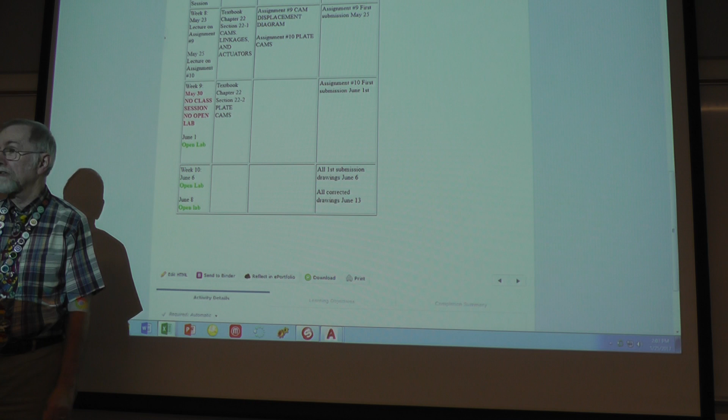All right. I have done a couple of things here recently, as in today. I have gone back in and actually updated the course calendar for this class to make it actually accurate to how things are happening. We are on May 25th, week 8, and the last lecture on the last assignment is today for assignment 10, and that'll be it.

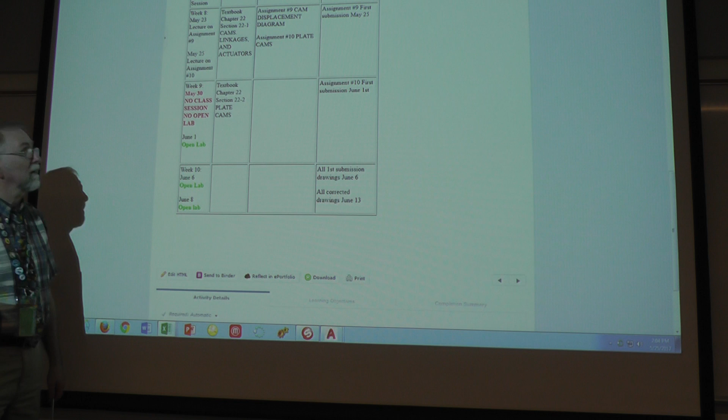Assignment number 9, the cam displacement diagram, is due today. That is a printed out B-size drawing, and I have some to hand back from people that turned some in Tuesday. Next week, there is no class session and no open lab next Tuesday. I'm taking half a day personal leave because I have to use it up or I don't get it. So I'm going to take it. I've got some retirement paperwork I have to do, and that's just the way it is. So don't expect anybody to be here next Tuesday.

Is that for evening class too? Evening class will still be in existence. No, it's just for the kinematics class. You don't get any time off for that. If I'm here, you're here.

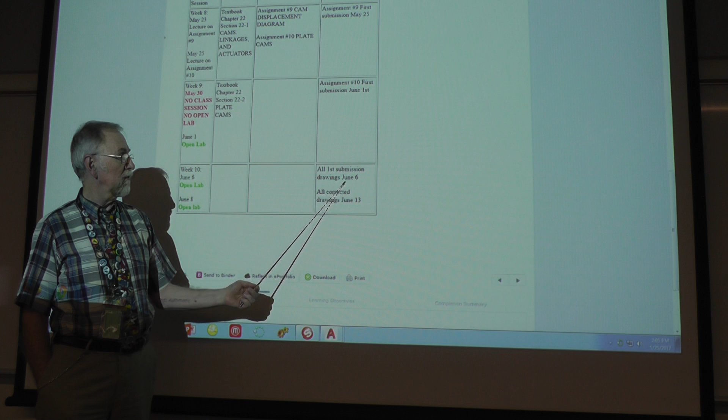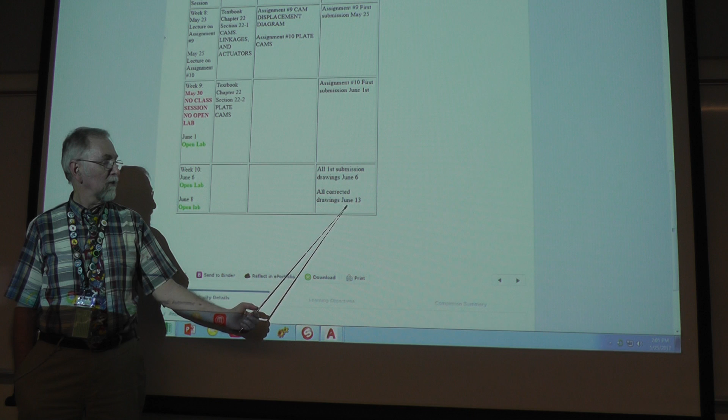Assignment number 10 that I'm giving out today, the first submission will be due next Thursday, June the 1st. And then any and all first submission drawings need to be in to me Tuesday, June the 6th. And all drawings that have to be corrected need to be turned in Tuesday, June 13th, and that's it. There will be no drawings accepted after that point. I have to get my grading done because I'm leaving. So I don't want to be here till Friday, working on it over the weekend or whatever.

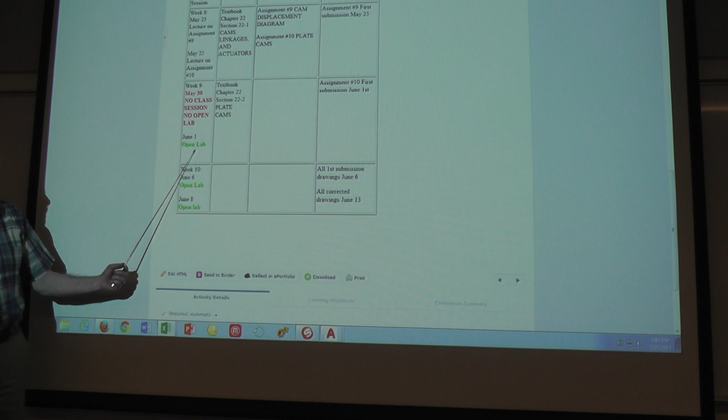So that's it. Which means there will be open lab June 1st, June 6th, and June 8th that you can come in and work on assignments, anything that needs to be taken care of. All right, questions? Crystal clear. All right.

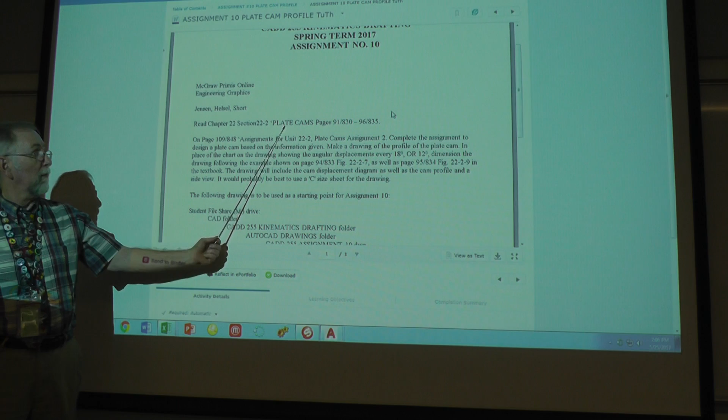Then the assignment. Let me go back up here to content. Assignment 8 is still in here. We did not do assignment number 8. There was just a bunch of drawing to be done, and I gave you a break on that. So assignment number 10. The actual assignment itself as a document is chapter 22 out of the textbook, section 22-2 about plate cams, pages 91 to 96. It would probably benefit you to go in and take a look at that.

On page 109, assignment for unit 22-2 plate cam, assignment number 2. Complete the assignment to design a plate cam based on the information given. Make a drawing of the profile of the plate cam. In place of the chart on the drawing showing the angular displacements every 18 degrees or 12 degrees, dimension the drawing following the example shown on page 94. I'll go back and pull that page up and show you what I mean, as well as page 95 in the textbook. The drawing will include the cam displacement diagram as well as the cam profile and a side view.

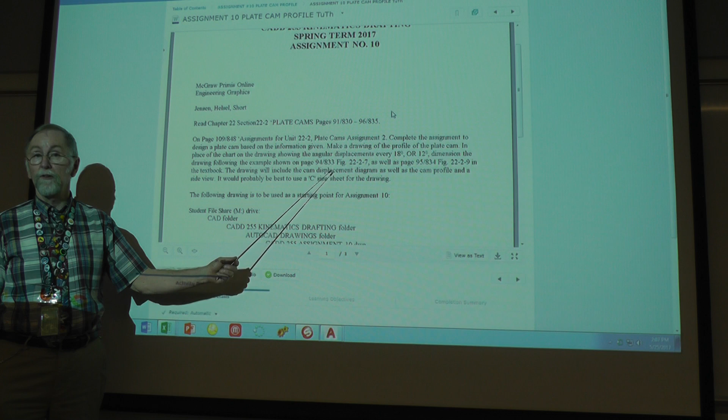It will be best to do it on a C-size drawing. You should do it on a C-size drawing. Maybe I should say that. You did assignment number 9 to create a cam displacement diagram. In order for you to know the process, I have drawn the cam displacement diagram for you in this assignment to make it a little easier. You're welcome. And the following drawing is to be used as a starting point for assignment number 10.

It's accessible on the M drive, student file share, M drive, CAD folder, CADD 255 kinematics drafting folder, AutoCAD drawing folder, and the drawing name will be CADD 255 assignment 10 drawing. It is also available in the D2L folder as CADD 255, or maybe it's just assignment drawing. I'll take a look at that.

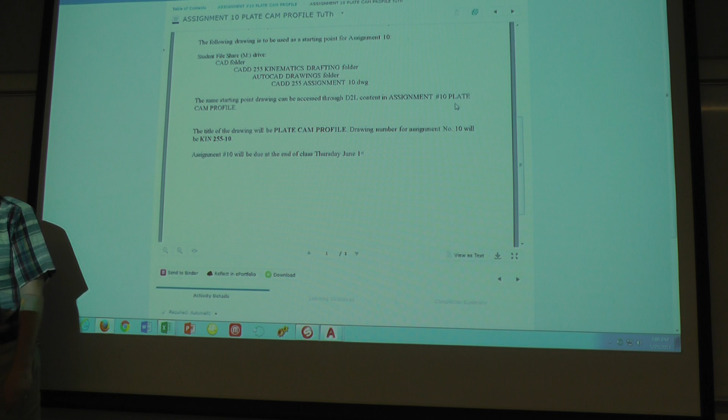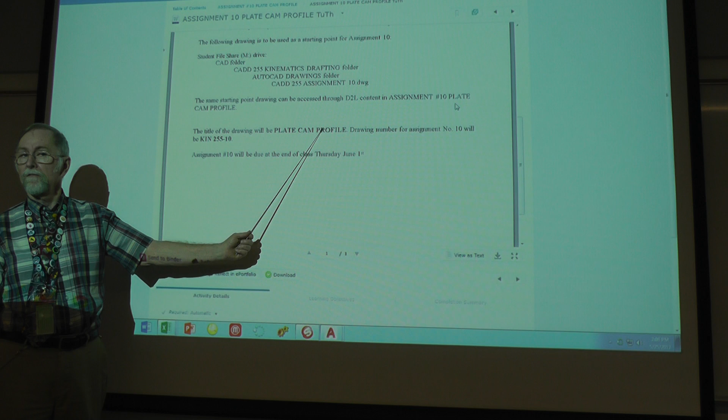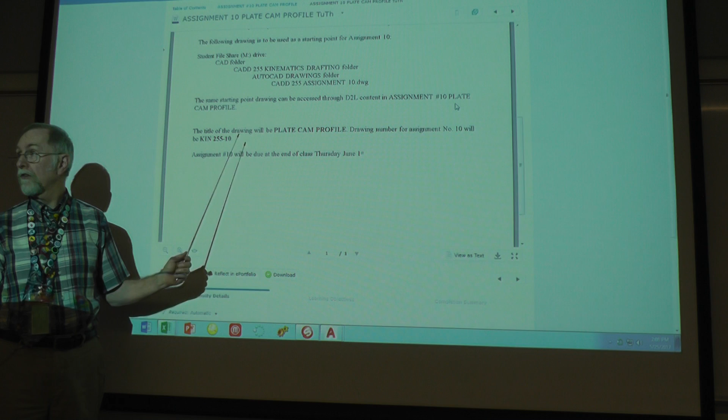All right, title is going to be plate cam profile. That height is 5/32 of an inch. The drawing number is KIN 255-10. The height of that is 1/8 of an inch. Yes. This is a 1-to-1 ratio drawing. It's just full size, 1-to-1.

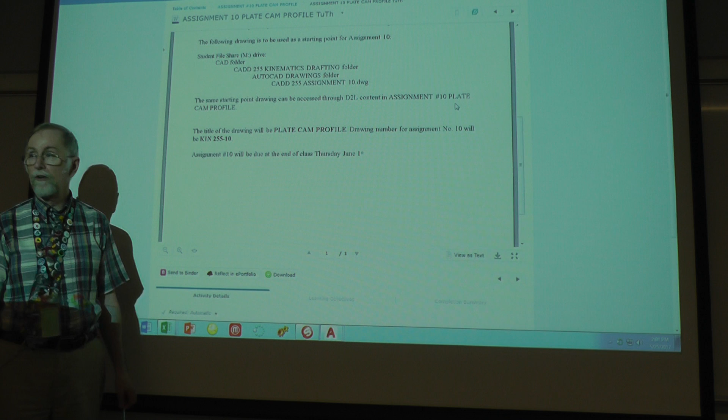And then here it is, due at the end of class on Thursday, June the 1st. It's not a very difficult drawing. It's kind of tedious to put it together in a way, but it's not that hard. You just have to keep your mind about you. All right, any questions on that? All right.

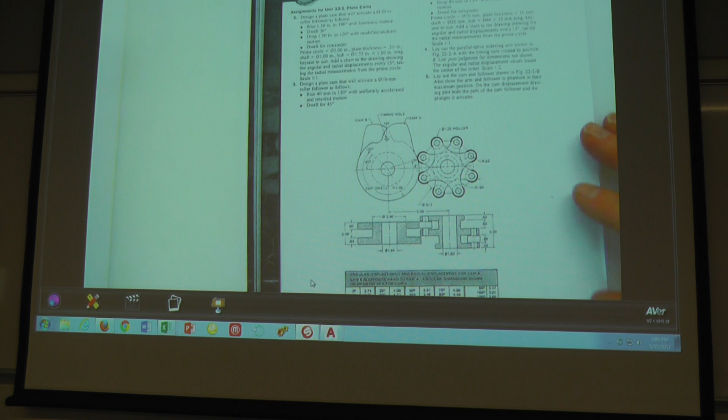Then let's take a look at the textbook. Our wonderful little projector here that never seems to quite focus.

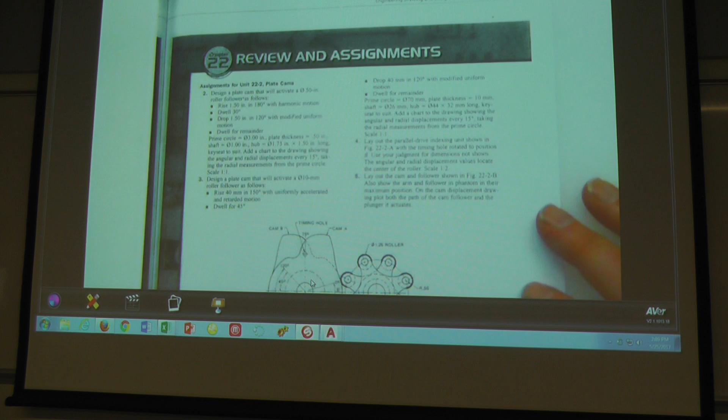You know, as soon as I leave, they'll get a new video projector in here that'll be crystal clear. That's probably what will happen. They kind of threatened that they were going to replace it this year, but I never followed up on it. That's probably my fault. Hey, what about our new video camera?

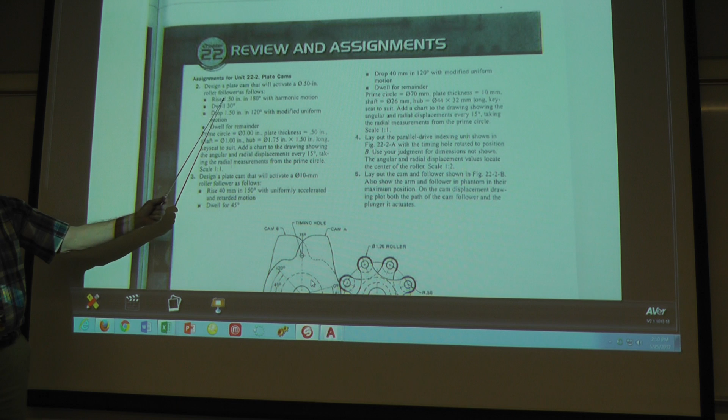All right, a plate cam that will activate a diameter 0.50 inch roller follower. So that's the diameter of the roller follower, 1/2 inch. The design criteria is it's going to rise 1.5 inches in 180 degrees with harmonic motion. It'll dwell for 30 degrees. It'll drop 1.5 inches in 120 degrees with modified uniform motion and dwell for the remainder.

There is something called the prime circle that is 3 inches in diameter. I'll explain that more fully when I pull up the AutoCAD drawing. The plate thickness of the cam is 1/2 inch. The shaft that's going to go through the plate is 1 inch in diameter. The hub that's attached to the plate that the shaft is going to go through is 1 3/4 inch in

diameter by 1.5 inches long, and the key seat needs to be sized to suit that, although you'll probably find in the drawing that I gave you it's already been sized and it's correct, so you can go back and verify that. I know you will. You'll want to go back and check to make sure that I did the right numbers here.

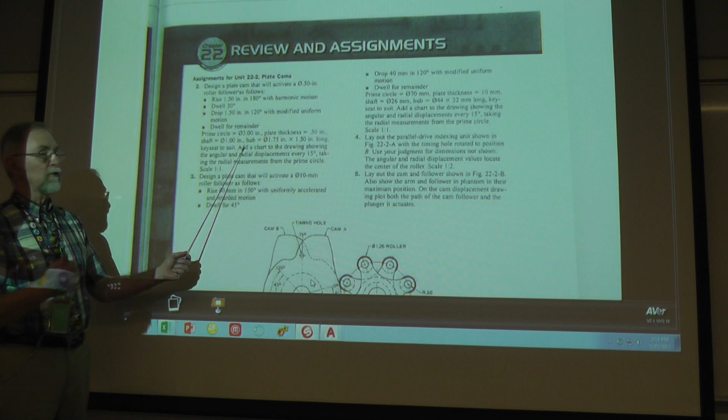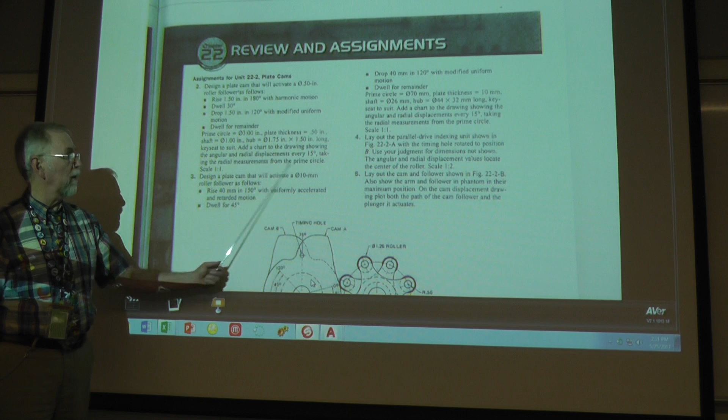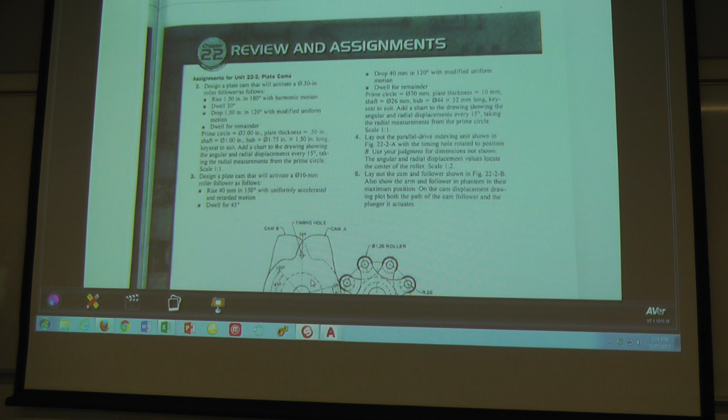All right, in the example drawing in the textbook, and in this assignment, it says to add a chart to the drawing showing angular and radial displacements every 15 degrees, taking the radial measurements from the prime circle. We're going to do some of that. You're not going to do all of this in here. We're actually going to draw it up a little differently and not include a chart. So that's the actual assignment that you can go back and reference. And the drawing will end up looking like this.

When I get done talking about this particular project, I'll pull the screen up and the sample drawing, full size, will be behind here on the C-size drawing that you can take a look at. Also in D2L, there is a PDF that you can access. So the AutoCAD start drawing, which I'll get to, that's the cam displacement diagram, and the PDF sample drawing is available to you, as well as your cell phones and taking a picture of the drawing that you seem to like to do.

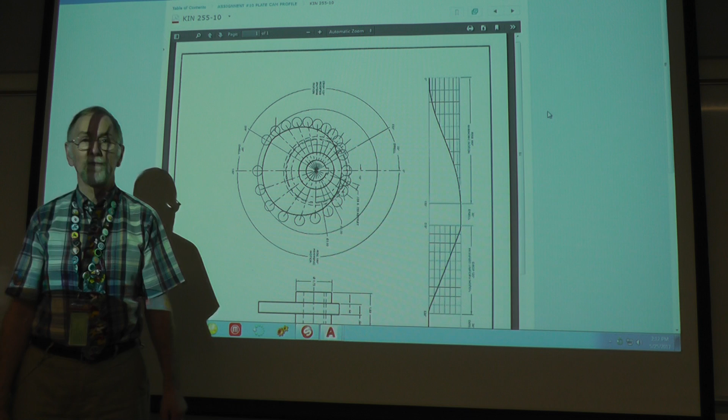All right, questions so far at all? You don't know enough to ask the questions. All right, then let's dive in here.

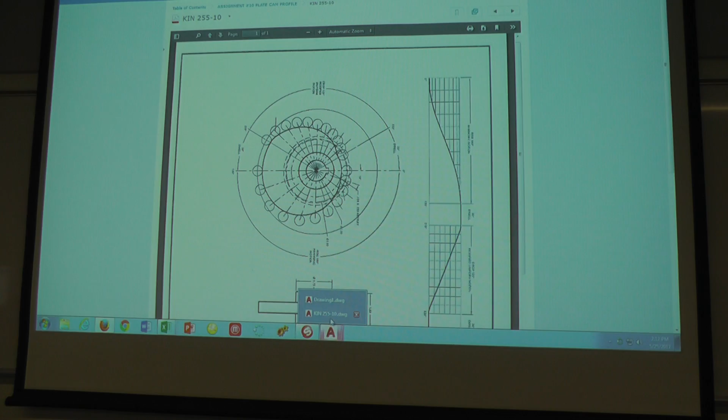This is already in the drawing, slightly over to the side. Just like in assignment number 9, you're going to use Arial font, bold font style, 0.10 height for the indicators of where the rise starts and stops increments, where the dwell period stops, where the drop starts and stops, and where it stops at the end here in the last dwell period.

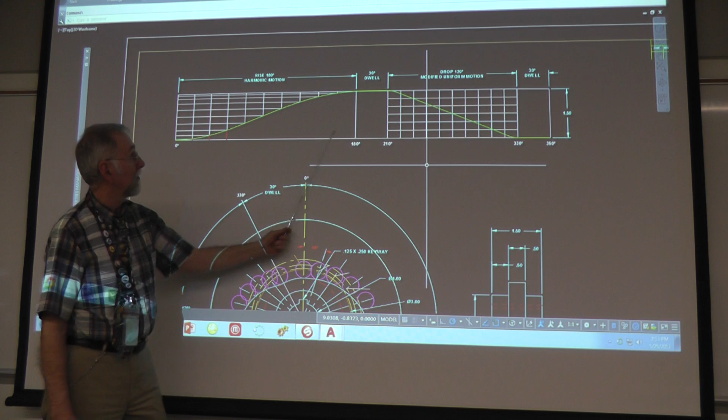This is another 12-inch long diagram, and it's 1.5 inches in height, as opposed to 2 inches from assignment number 9. This is divided up into 10 equal increments this way, and 10 equal increments this way. I took out a lot of the construction lines in here just to clean it up a little bit. This has 6 increments this way, but it has 10 increments of angle in here, because it makes the profile turn out to be a little more accurate than just 6 and 6.

This is harmonic motion that you've used in assignment number 9, and this is modified uniform motion. There's a little radius right here at the top and a little radius down here at the bottom, so that it doesn't jerkily start and jerkily stop at the start of the drop and the end of the drop. It transitions into it a little bit.

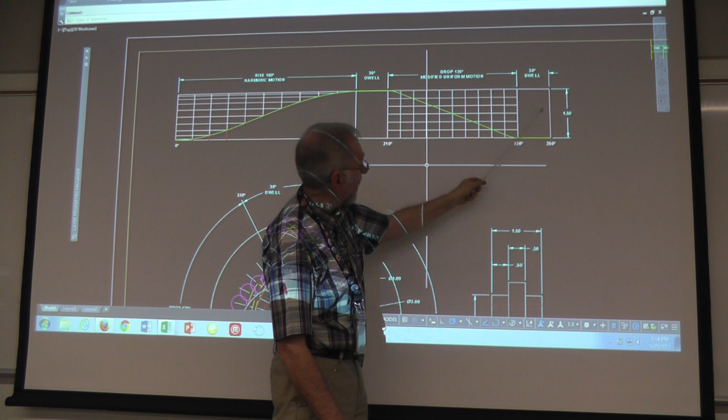This is a 0.75 radius up here. How did I get that? Well, it's 1.5 inches in total height, and if you come down to the halfway point, that's 0.75. That would be the center line of an arc that would be drawn in here. It would be easiest if you used that center point and drew a 1.5 diameter circle here and a 1.5 diameter circle here, using line command and the tangency option. Make the line tangent to the edge of the circle up here and down here, and then trim it out. That's the best way to get that line in there.

You didn't really need to know that, but I'm telling you anyway. Extra bonus material.

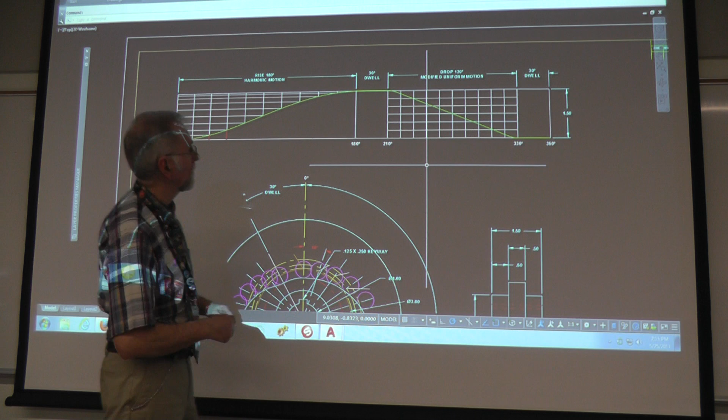All right. Okay. Same kind of thing. 0.13 line weight on your construction lines here for the grid, and 0.53 line weight for the actual profile line. Actually, you're not having to worry about that. I already did that for you, come to think of it, as you insert it. Never mind.

All right. How are you going to start? Well, what you can do is go ahead. I'm going to put layer 0 on here. You can do the insert command.

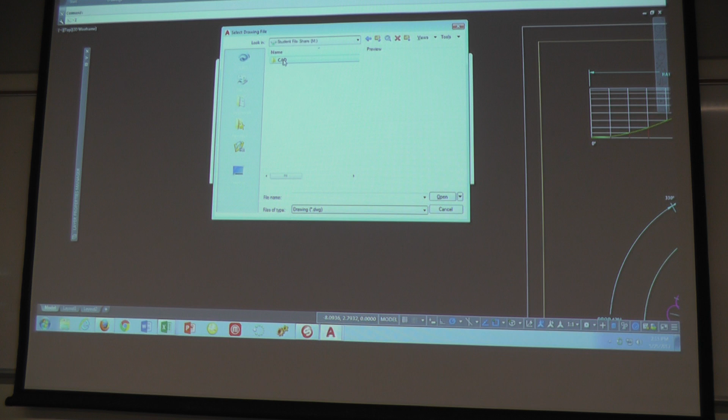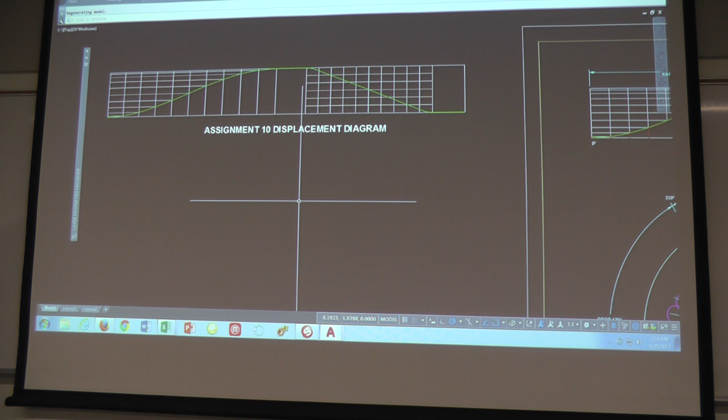You can go out here and browse and get it off the M drive, CAD folder, 255 kinematic folder, AutoCAD drawings, and CAD 255 assignment 10 drawing. Open that up and insert it and plop it into the drawing. I put a label on it just so you know that you got the right one. This should not go into the drawing.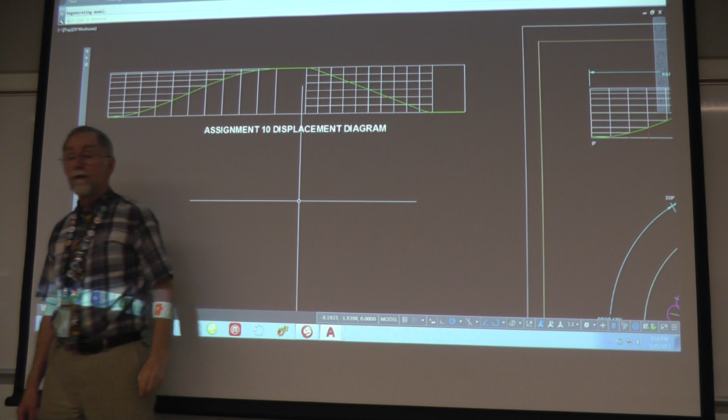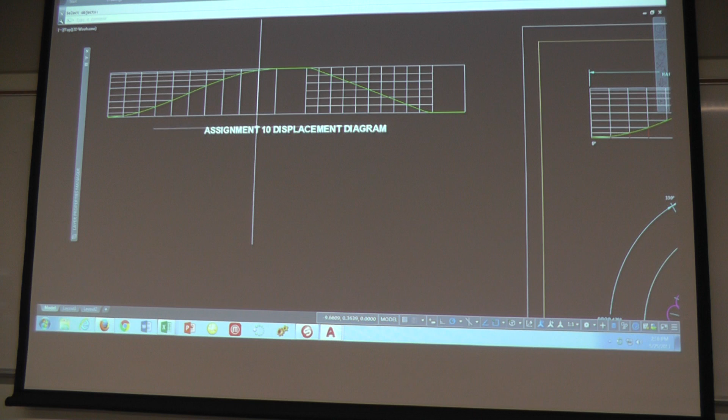To get rid of this, you're going to need to explode the block because it's been inserted. So X enter is explode. And then you can get rid of this text down here, and that'll be your starting point for your drawing. Okay, that's pretty simple. Questions? Everything's clear as mud. All right.

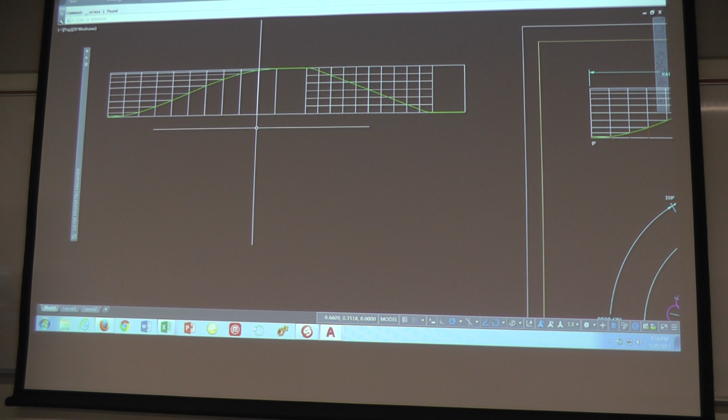And that's over here. And then the actual drawing itself, you will create a side view, which once you get your profile put together, you're going to project over into the right side view. So here's your parameters. Holes, this is the hole for the shaft. Holes can be dimensioned in the view that shows it as a circle. That's your 1-inch diameter there. Don't forget your hidden lines for it.

The keyway is shown here. Happens to be labeled as a 1/8 by 1/4 keyway, but you can go back and check to make sure that's correct. And then the hub diameter. The hub is actually a cylinder shape. It would be inappropriate, and against ANSI standards, to dimension the diameter of the hub out here in this view. It should be dimensioned in the view that shows it as a cylinder shape.

So you're going to show that, and since it's lines, you're going to have to include the diameter symbol in here, %%C, to get the diameter symbol. Then the instructions were that the plate cam thickness was 1/2 inch. The hub length was 1.5 inches. It didn't say anything about where the position of that was going to be. I arbitrarily said it was going to be centered on the thickness of the hub.

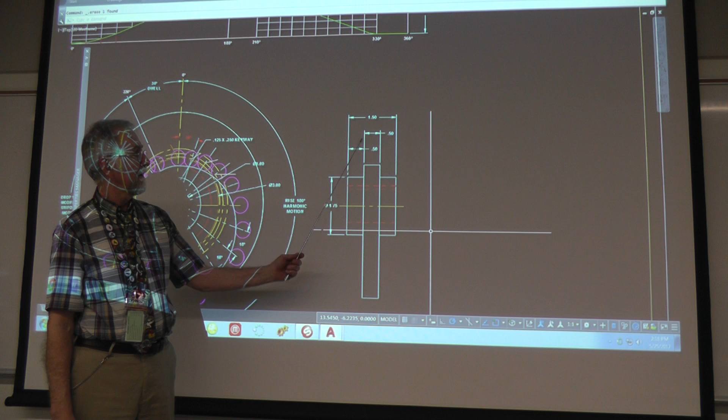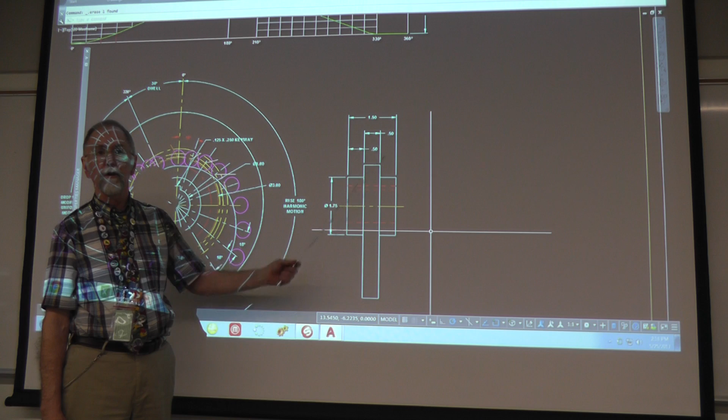You have 1/2 inch here, 1/2 inch for the thickness of the plate, and the other 1/2 inch totals up to your 1.5 inches. Dimension, not a third dimension over here. That will be superfluous and unnecessary. We don't put them all the way across. And center line and hidden lines. All right, how do we go about creating this profile here?

Well, you can start by creating the circle for the shaft, and that's going to become your center point. So it's going to be a little eccentric off of the center of where the shaft is located. And then here's the hub diameter. And then here's the prime circle right here. I've shown it in red on the drawing. That's the 3-inch diameter circle here. The prime circle, and let me zoom in just a little bit because I got a lot of stuff going on here.

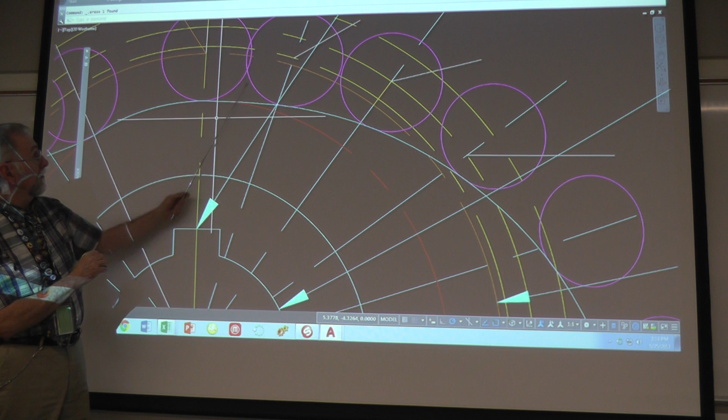Prime circle diameter, which is centered off of the center of the shaft, is where the bottom part of the cam follower would start at. So this is the cam at rest, and the cam follower is at its starting position, that base point on the cam displacement diagram. Now, the center of the cam follower itself. So if this is a 1/2 inch diameter cam follower circle, then the location of the center of it would be here at this point.

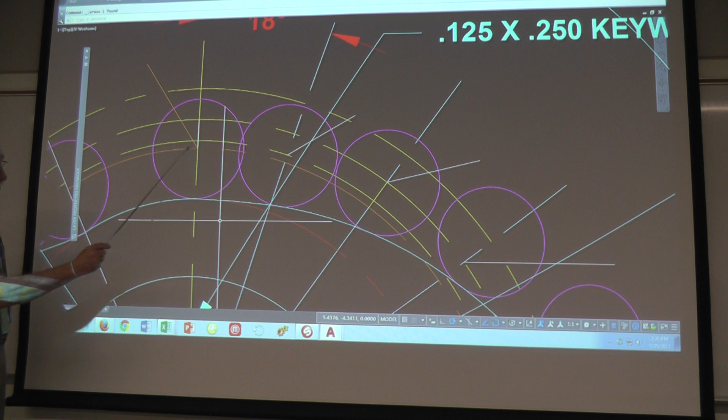To create these offsets, we're going to go back and equate that to the cam displacement diagram itself. It would be best if you created a circle, and I've made it orange here, which would coincide with the center of the cam follower diagram. So this circle is 1/4 inch offset from the prime circle itself. Is everybody with me on that? Okay. And that's at the 0 point.

And then I'm going to have equal increments of angle in here. And then I'm going to have offsets, which are going to create where the cam follower would be when the cam actually rotates. So this is going to be here. The cam would rotate and make this rise and fall. But in the drawing itself, the cam profile stays stationary, and we move our cam follower diagram around.

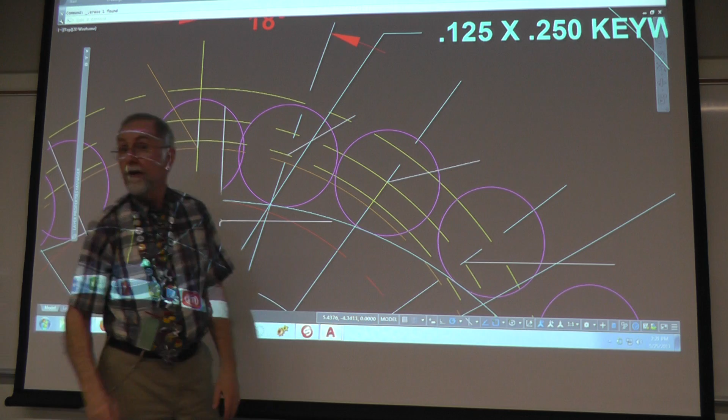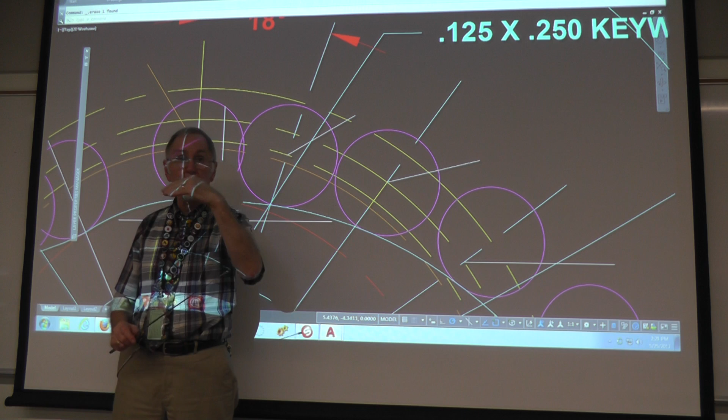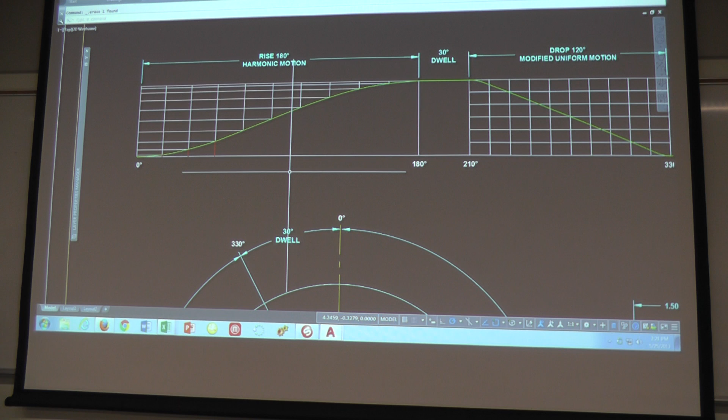Then we come back and make a spline line and use the tangent option and get it to be as close as we can to tangent to that bottom edge of the cam follower diameter. All right. So let's continue on here. Go back to our diagram. We have 180 degrees of rise, and we're going to have 10 increments of that 180 degrees. So 180 divided by 10 gives me 18 degree increments. So every time I hit this, that's an 18 degree increment.

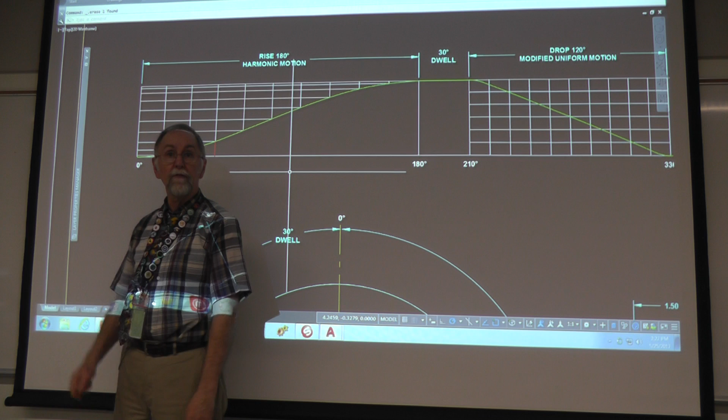18, 18, 18. And to be able to figure out what the length of this is, remember in assignment number 9, we took 12 and divided it by 360 degrees to get how much linear it went around per degree. And 12 divided by 360 is 0.0333333, and on out. So I can take 180 multiplied by 0.03333 and get the length that this is going to be on my cam displacement diagram. Although it's already been drawn for you, so you can verify that. And that's how that gets developed, which is why I had you do assignment number 9. All right.

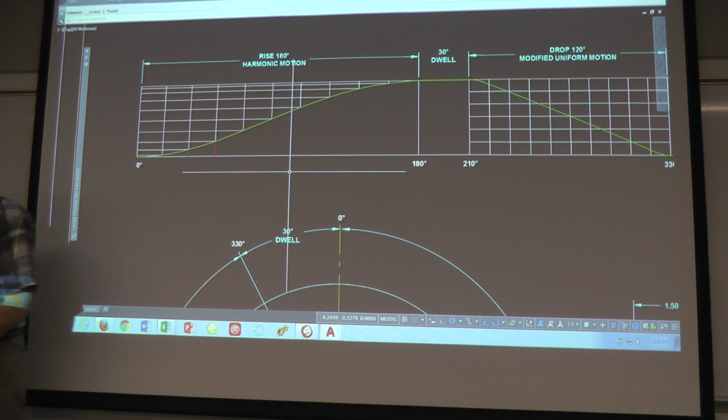Once I have my profile established, then this is 0, which equates to that start position, and then I come over the first 18 degree increment. There is a vertical rise from the baseline of my diagram to the first intersection point of my spline. The length of that offset is 0.0381, which I've written over here. That's how much that cam follower is going to move when the cam rotates 18 degrees as it starts out. That's my displacement. All right, everybody got that in your head?

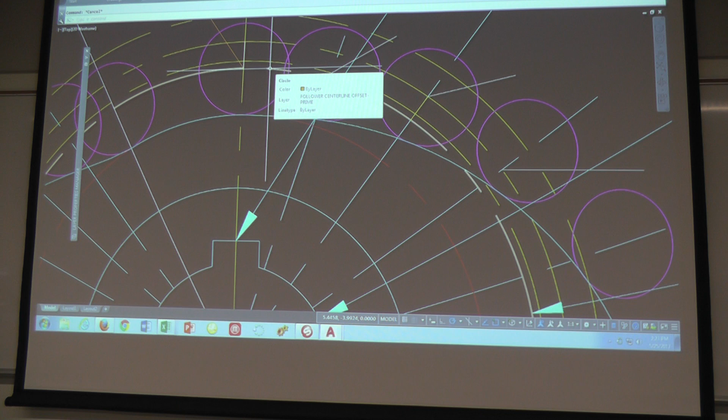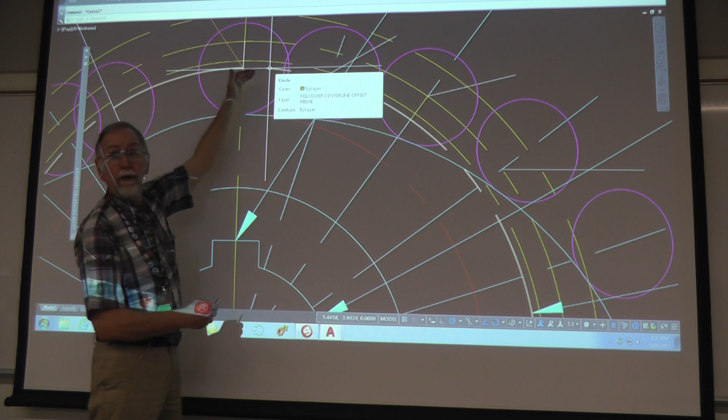All right, so if I come back to my diagram, here's my first circle that is offset 0.25 inches from the prime circle to get the difference between where the bottom of the cam follower is and the center point of that. Because I could move this over and kind of measure off of the prime circle and the bottom edge of the cam follower, but it's a little easier to actually use the center point of it and create my diagram. All right.

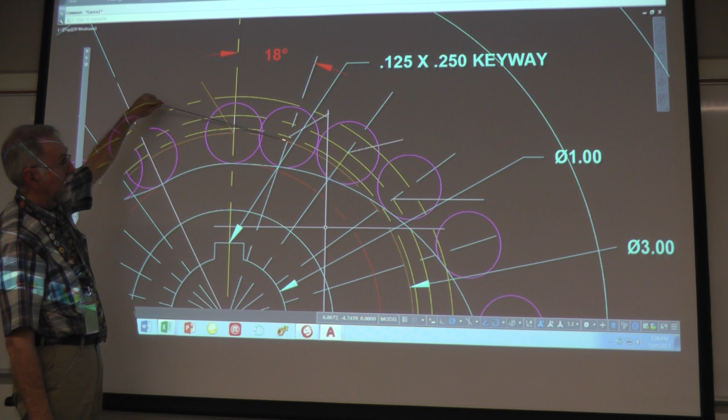So notice that this circle is right here, and I've kind of indicated, so here's my first 18-degree increment, which is this center line right here that's going through. And if I offset from this circle that indicates where the center of the cam follower starts at, this should be then my 0.0381 offset vertical distance. It equates to this first segment on my diagram.

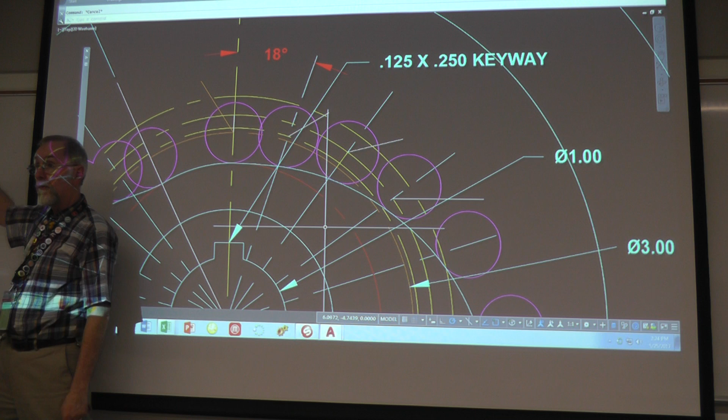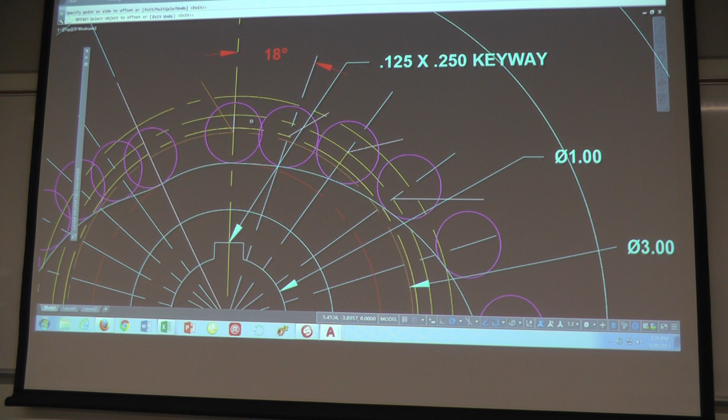So if I actually did an offset command, put in 0.0381, offset the center line out, it coincides exactly with this other one. I probably should have made it a solid line here, so you can't even really see it. So maybe it would be better if I actually did red here. Put a line in from this point to this point and measured it, and there's my 0.0381 offset in my first 18-degree increment. Okay. Let's take a look at the next two.

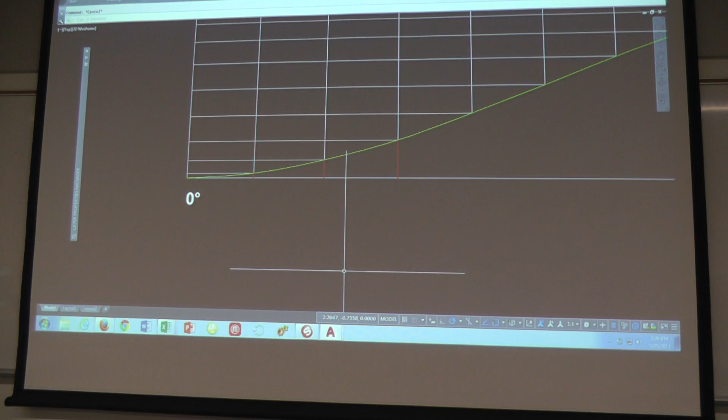All right, the next increment over, it's going to be 36 degrees, but it's another 18-degree increment. That distance offset is 0.1462. I go back and I measure, or actually put a line in here, from the center location of the cam follower to that point right there, and measure it, I get 0.1462.

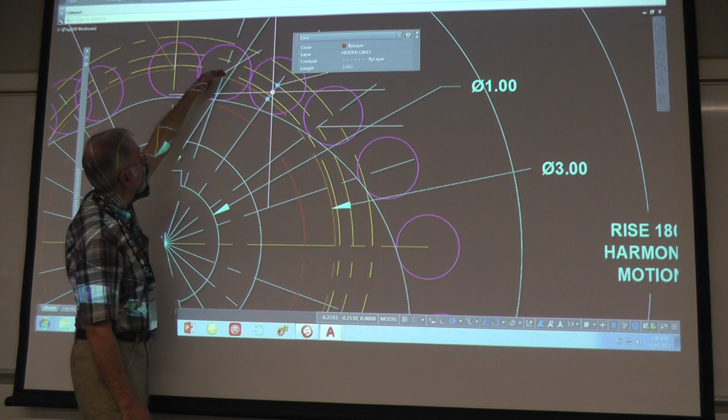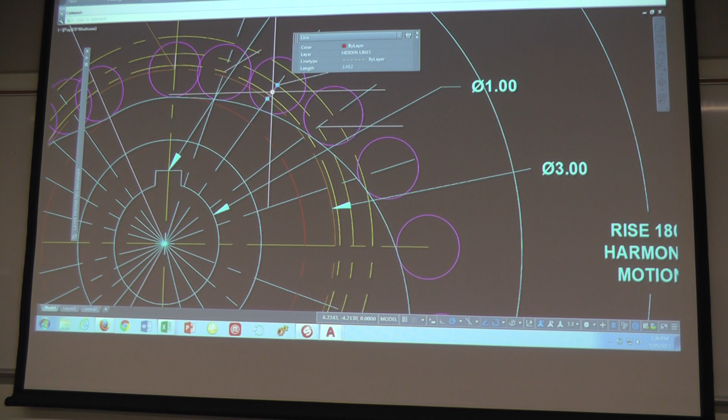So once I have those offsets, I can take this circle and copy it, center of the circle to center of the circle, and then I'll do one more out here. Actually, I think I have that line in the wrong spot. I need to stick it there. Let me move that for a second. And we do that for every purple circle? Yes. You've only done 3 of them here on the example? I'm going to do 3 of them to show you that process. Okay. Make sure I got that in the right spot.

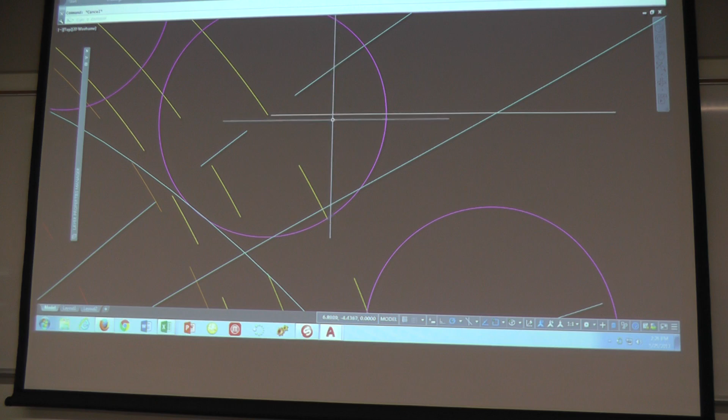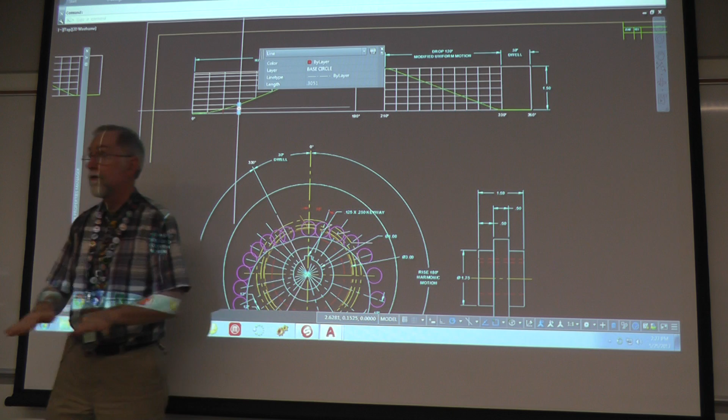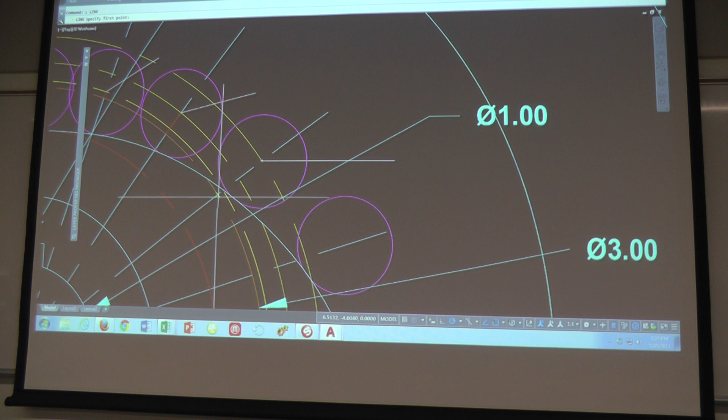So then the third one is 0.3051. I'm doing these offsets. All these offsets are going from my initial center circle that shows the center of the cam follower when it's at the 0 position. I'm not offsetting from the one that I just offset and offsetting out from that. I'm always going back to the base point. Now let's see if I got my line in the right place here. So if I draw another line, here to here, 0.3051. I just continue that on around.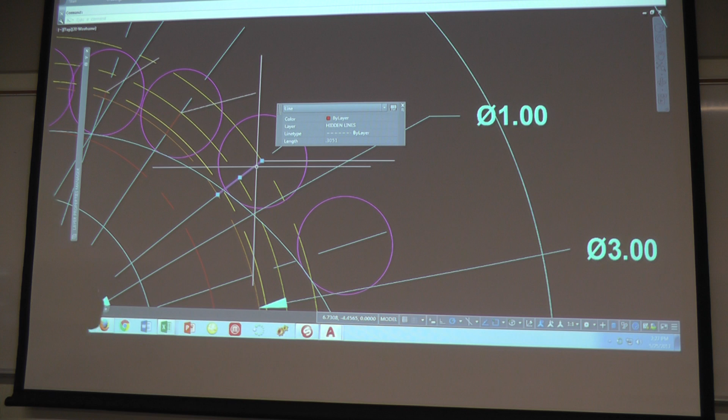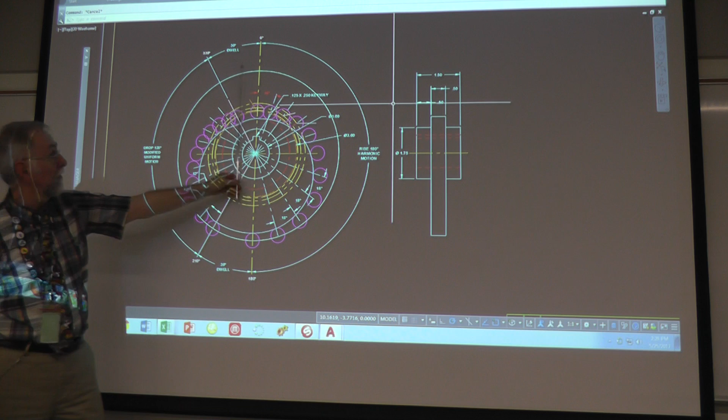All right. Also, to help with your drawing, now I made this center line extended out to do some dimensioning, but if you did a center line from the center of your shaft out to about here as a line element, then did an array command and arrayed it 180 degrees and put 11 items in there to get 10 of these. So make sure you've got 10. 1, 2, 3, 4, 5, 6, 7, 8, 9, 10 to the 180 degrees.

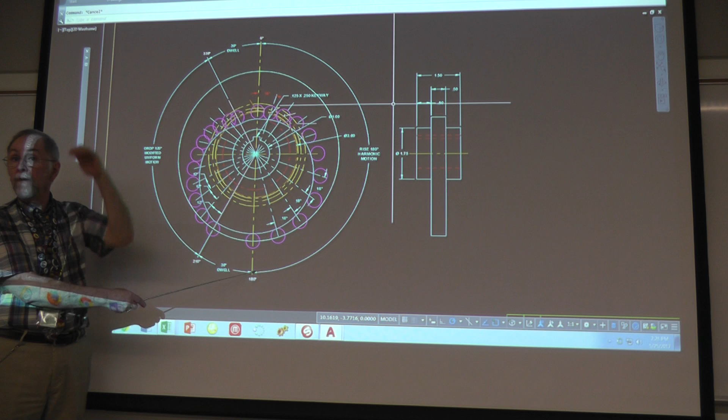So each of these are 18 degree angles in here. And I'm just progressing out. I get down to 180 degrees, and then whatever that length is, well, it happens to be 1.5 because I'm now at the top of my rise. Then this is going to be 1.5 out to here as well because I have a dwell period. Then I'm going to go back to the other side of the diagram and work my way down.

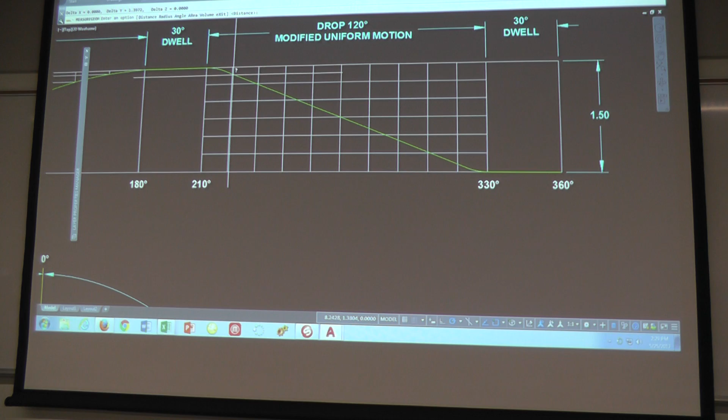So I would measure or draw a line from here to this intersection point. That happens to be 1.3972, and these are 12 degree increments because my drop is in 120 degrees. I'm dividing it up into 10 equal increments to keep my accuracy going here.

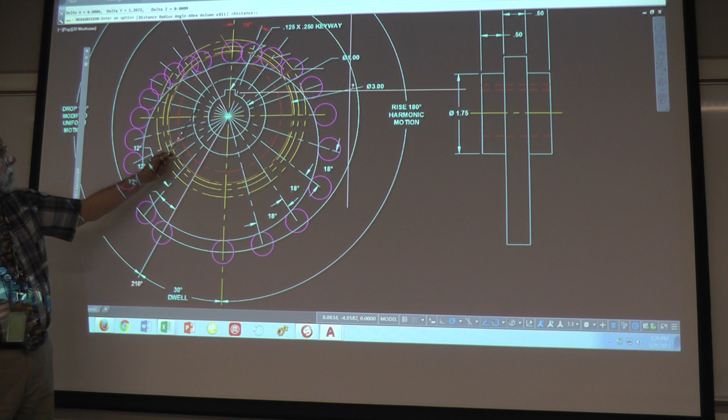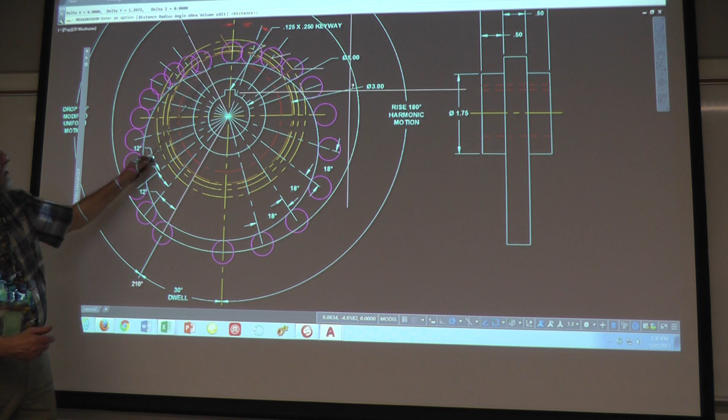And if I were measuring from here to the center of where this arc is, that's my 1.3972 inches. I just work my way back. I get to this point and it stays where it is and dwells. Then I come back in here and I create my spline. Just like you did in assignment number 9, I'm going to go from here down to 180 and stop it, and then this is going to be an arc off of that center line, and then another spline around up into here, and then another arc to incorporate that last dwell.

How I check these is I have a little cardboard cutout of the right size and shape. This is going to be a plotted out drawing on C size. I get your drawing, I stick my little full-size cardboard disc over the top of yours, and if they match up, I'm satisfied. If they don't, I get my red pen out and show you where you did that wrong. Okay, there's a trick to dimensioning this 180 degrees.

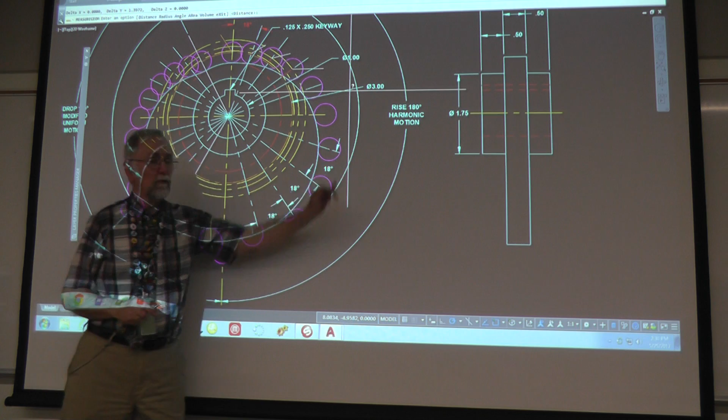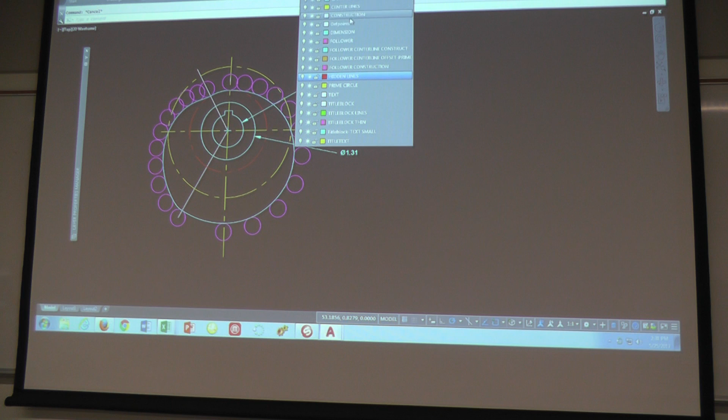And the trick is the fact that that should be one line segment to the center line, and this should be a second line segment, not a continuous line from the top down to the bottom. So if I want to do an angular dimension in here, I'll want to put my dimension layer on. If I do an angular dimension and pick this line and this line,

oh, I must have moved that yesterday. Let's see. Oh, I didn't move it back. Let's see if I can move it back. That's minus 0.25. So if I do angular, and it's perfectly horizontal or perfectly vertical, AutoCAD says I can't dimension that angularly because the lines are parallel.

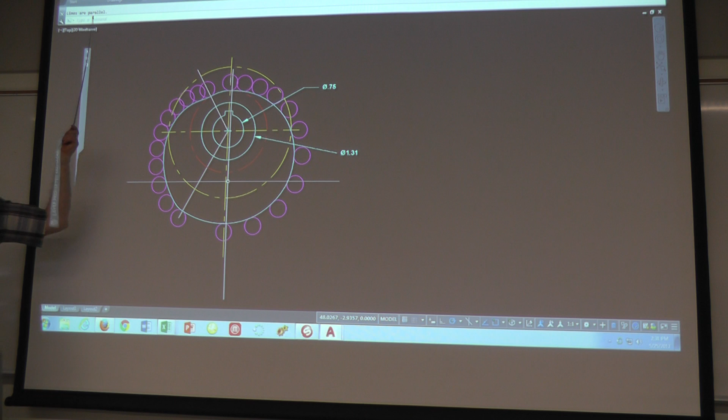What I suggest is that you take this line and rotate it about 1/4 degree, and then have whole numbers in your dimensioning style for your angular dimensions. Don't have decimal places in it. Then when you put the angular dimension in, oops, I gotta rotate it back. Then I can put an angular dimension in. We trick AutoCAD a little bit, so that's why I had to extend my lines out a little bit to get my dimensioning in here.

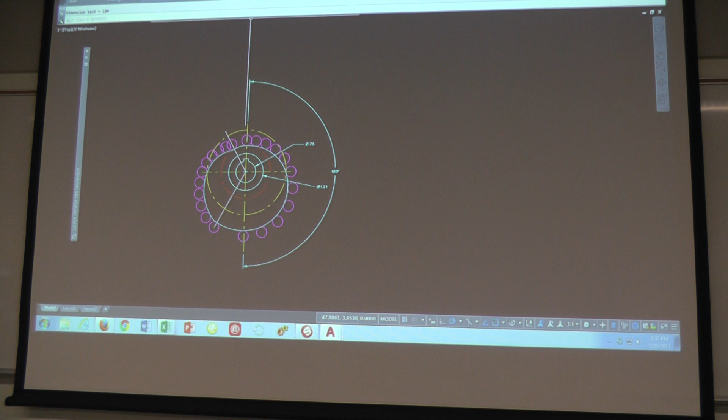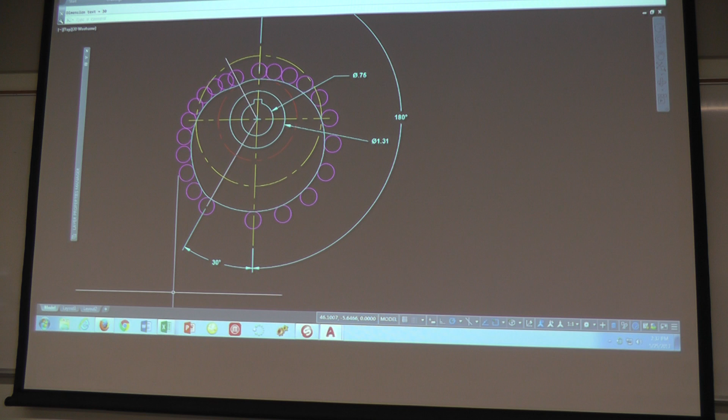Something like that. And then when I do another angular dimension between this line and this line, at only 1/4 degree, and you have whole numbers in your angular dimensioning style, then it'll show up as 30. And that is such an insignificant amount nobody will ever see that it's not vertical in the drawing. If you're a real stickler for accuracy, you can put the dimensions on and rotate this back the 1/4 of a degree.

It doesn't take much, and it would be perfectly correct, but we're not making the cam from this drawing, we're making the cam from the dimensions that are on here. And that will solve the problem of getting the dimensions in. And then you just override the text to get the 180 degree rise harmonic motion based on the sample drawing. Any questions? Proper line weights, proper line types, proper text style, proper dimensioning.

Do you want us to keep the offset circles in our plot? You wouldn't have to. It probably would be easier if you didn't. After a while, there's quite a bit of stuff going on. For drawing purposes, it would be better if you put them on a layer and hide the layer, or you can just delete them after you've done the construction. I'd keep them in there to the last, and then get rid of them, and just clean the drawing up a little bit.

All right. Do you want the file? I don't particularly need the file, but it might help if I have a question about what you did. I could open up the electronic file and go in, if it was a text style kind of thing, and I could put that on the drawing. And I did create a drop-off for an electronic file if you wanted to. But I'm looking for the plot to grade and correct. It's a lot easier for me. And that will be it.

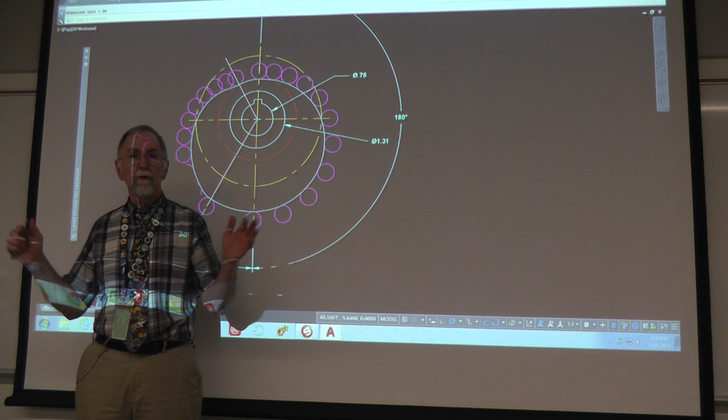That's the last assignment. There's 8 assignments that have been done throughout this term, counting a couple of calculation things and drawings. If you're done with all 8 of them, and I'm signed off on them, you don't have to come back. You're all done. So if you get done next week, you can concentrate on something else. You won't have to worry about kinematics, and I won't have to worry about grading projects. And everybody's happy. All right, any other questions?

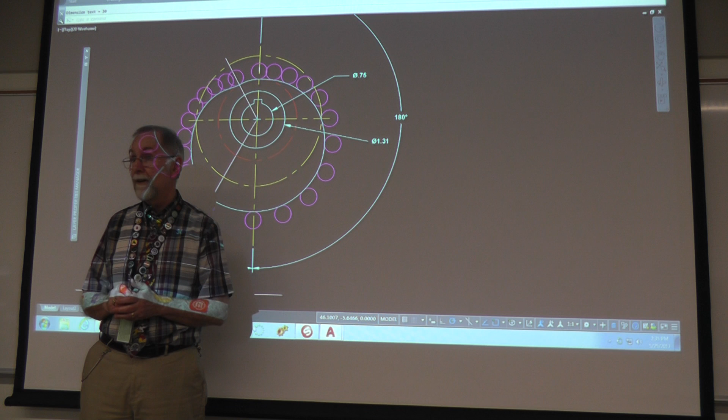And then if anybody hasn't done a 3D gear print yet, the machines are wide open today, obviously. And that needs to be done.